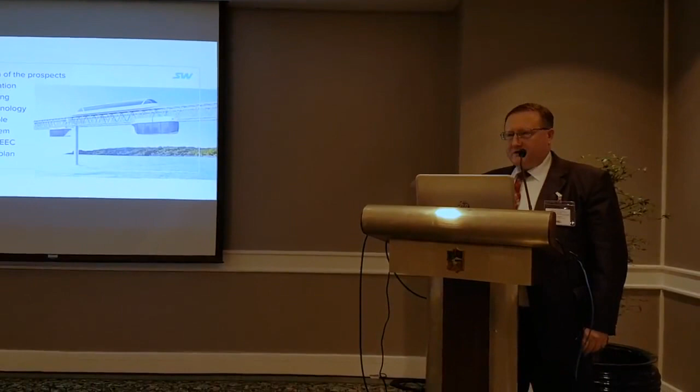Today I want to speak about the possible implementation of SkyWay technology for the Thailand Eastern Economic Corridor. First, I want to speak about the technology itself, so that you would know how it works. Then I want to speak about three possible applications which can be used here in Thailand. And I want to finish with the conclusions and the effect it can bring to the economy of Thailand.

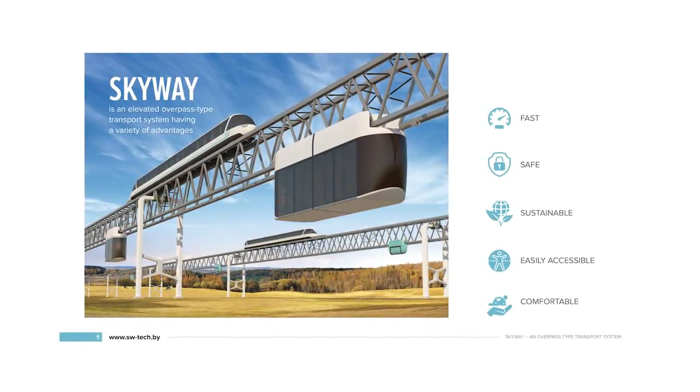First of all, what's SkyWay? It's a transport system situated at the second level, which has several advantages: it is fast, the speed is up to 500 kilometers per hour, it's safe, it's ecologically sustainable, it's easily accessible, and it's comfortable.

Now I want to show you a small video, so you will see everything with your own eyes. I want to attract your attention to the fact that everything shown is not computer graphics, but a real video operated in our agricultural park in Belarus.

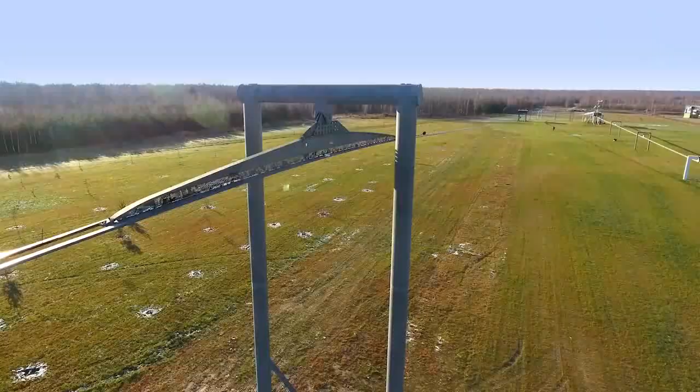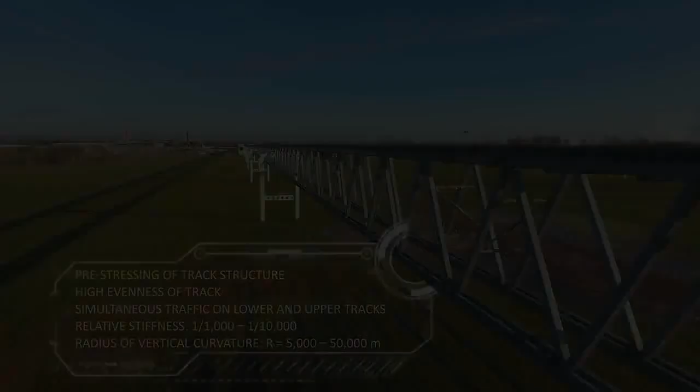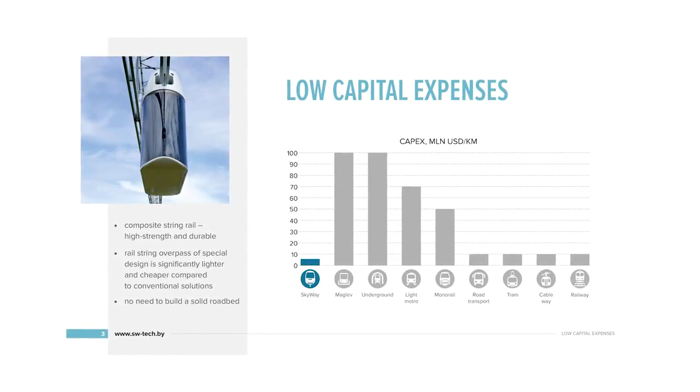The main idea is that we use a very light but very rigid string rail, which is based on pre-stressed strings put into concrete. That's why we get a light but very solid structure. That's why it consumes less material, and that's why it's cheaper.

Further on, we have minimal operating expenses. If we compare with conventional transport, we can see that the most part of the OPEX is labor expenses and cost of fuel. In our case, it's the least part.

Our transport is driverless, so we use an automatic control system — I will speak about that a bit later. And in general, our transport system is 2 to 5 times cheaper in terms of OpEx compared with conventional transport.

The next point is our transport system is ecologically sustainable. We use minimal land resources, and we use electricity, so it minimizes harmful emissions to the atmosphere, and lots of people like that.

And the last point is safety. The main issue here is that our transport system is situated at the second level, so it doesn't cross with existing transport at all, so traffic accidents are minimal.

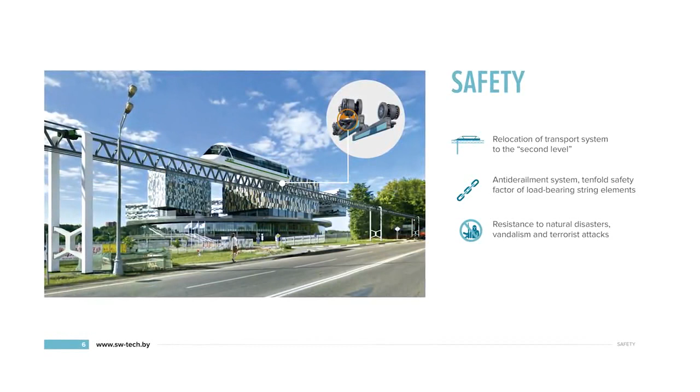The second point is the anti-derailment system, which you can see in the picture. It also increases the safety of our transport system, and it's resistant to natural disasters. The previous speaker was talking about floods here — it's also resistant to earthquakes, tsunamis, and other natural disasters, so this transport system won't be ruined if any natural disaster happens.

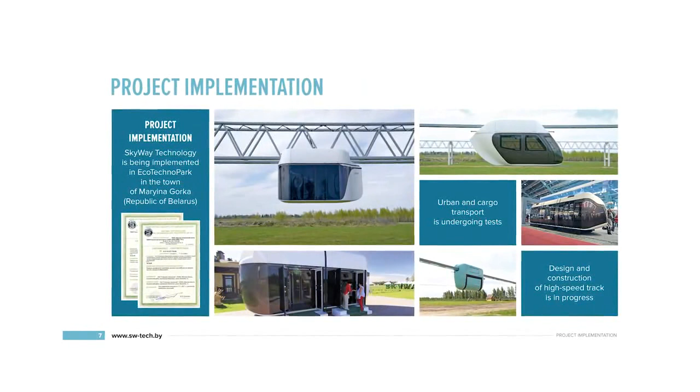I'll speak about them a bit later. Actually, at the end of 2017 we got certificates from the Russian Institute of Urban Transport. That's why these vehicles are not just operating, but they are certified.

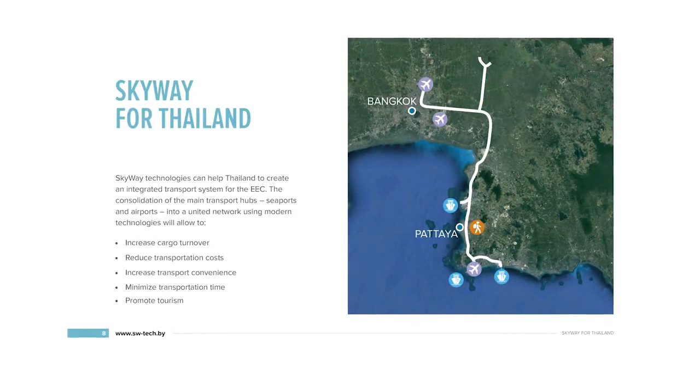Now let's think about how our technology can help the development of Thailand, in particular the Eastern Economic Corridor. You can see this map — the main point here is to connect the seaports and the airports into one integrated transport system. What can we do here?

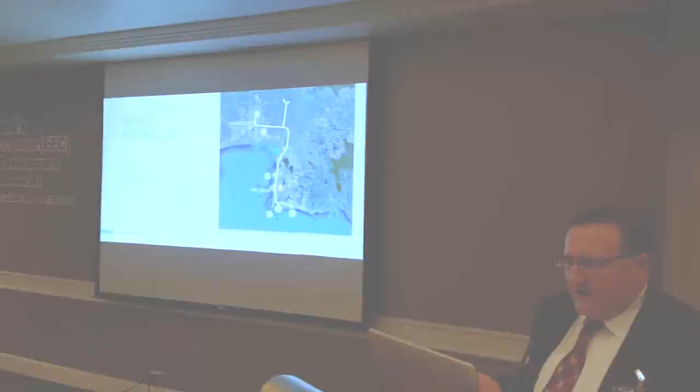First of all, we can increase cargo turnover, we can reduce transportation costs, we can increase the convenience of the transport, we can minimize transportation time because the speed of our transportation is up to 500 kilometers per hour, and we can promote tourism as well.

Now let's speak about our main solutions which could be applied here. First of all, it's cargo transportation. Speaking about the SkyWay transport system, it has several advantages: it's autonomous, it's point-to-point, it's high speed, it's ultra-safe, and energy efficient.

Here you can see how our container transportation could work. The speed is up to about 50 kilometers per hour, with automated loading and unloading. Its performance could be up to 30 million containers per year, and we can use the track, as I told already, for passenger transportation. We have different solutions not only for containers but also for bulk, break bulk, and liquid cargo.

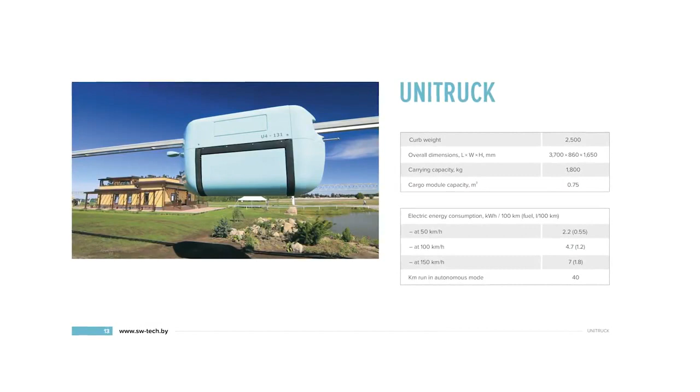This is our cargo module, called Unitruck. It's arranged for a small amount of cargo, for bulk cargo, actually 1.8 metric tons. But if we place them one by one, it can carry quite a great amount of cargo. We consider the performance of such a system about 100 million tons per year, even despite how small it looks. It's already operating at our EcoTechnoPark, so you may see it in the video.

We also have solutions for loading and unloading terminals, and I think all these cargo systems could be integrated, connecting airports and seaports into a unified transport system.

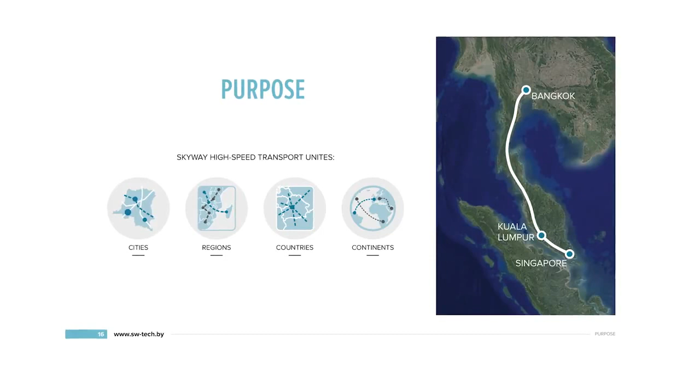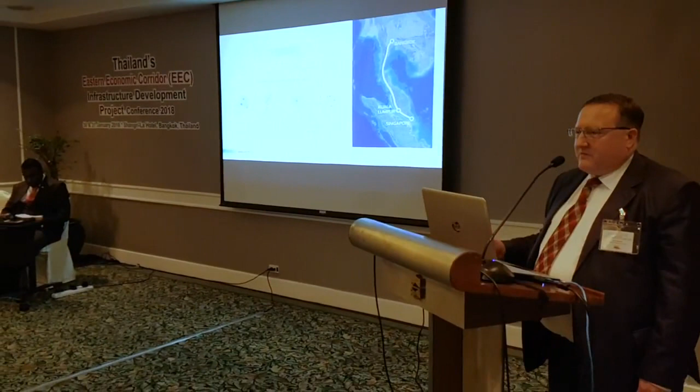The next solution I want to speak about is high-speed passenger transport. As I told already, its speed is up to 500 kilometers per hour. It's bigger compared with conventional high-speed trains, and it can be used to unite cities, regions, countries, and even continents. Here on the map I give a possible example of how it could be applied for Bangkok. We can connect Bangkok with Kuala Lumpur and Singapore, and yesterday we were discussing the Kuala Lumpur-Singapore project. I think this solution could also be applied to that project.

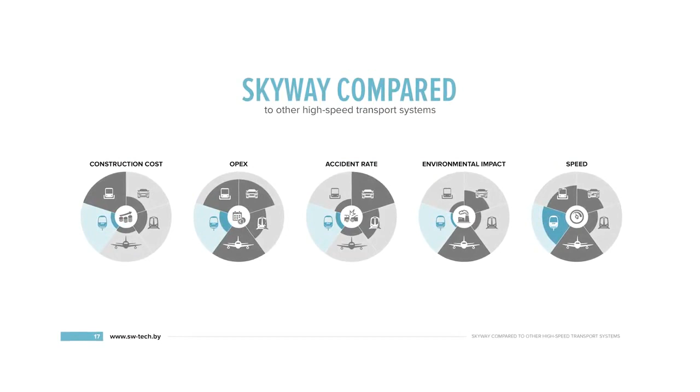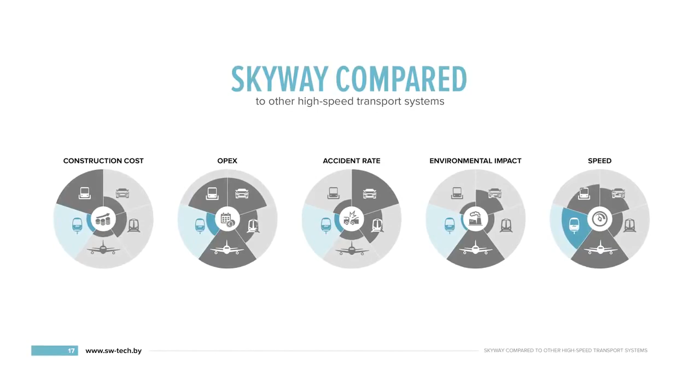If we compare SkyWay with other types of high-speed transport systems, you can see that in almost all parameters - construction cost, OPEX, accident rate, and environmental impact - we are better. Maybe the only point where we look a bit worse compared with aviation is speed, but we should take into account that if you go to the airport you anyway need to wait for boarding, stand in queues, and pass control.

In our case, you get from the city center or city suburb exactly to the city center or city suburb, and actually, whether you go 500 kilometers or 1,000 kilometers, you will get to your destination faster.

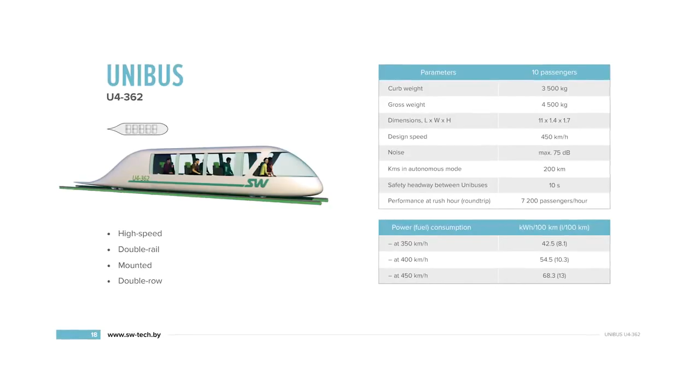These are the technical parameters for our high-speed Unibus. It's designed for 10 people, with a design speed of 450 kilometers per hour, and its performance is about 7,200 passengers per hour.

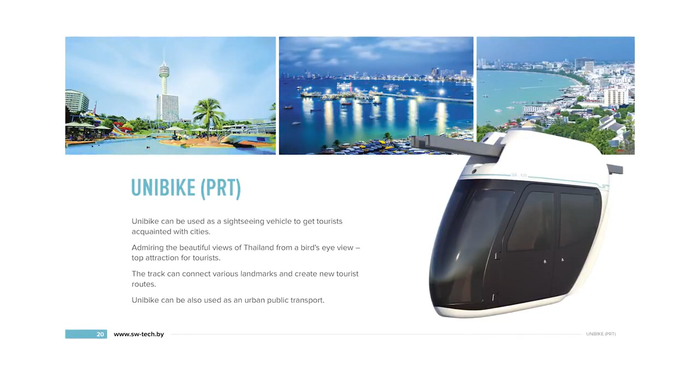The last solution I want to speak about is urban passenger transport. First, I want to speak about Unibike, which is some kind of PRT designed by our company. It's designed for 2 persons, but there could be solutions from 1 to 5 persons. It can be used as a sightseeing vehicle - for example, it would be really great to go by Unibike on safari, or to see natural places from a bird's eye view.

It can also be used as standard urban public transport. The idea is that we just put them one by one, so they can carry quite a lot of passengers. I'll show it later.

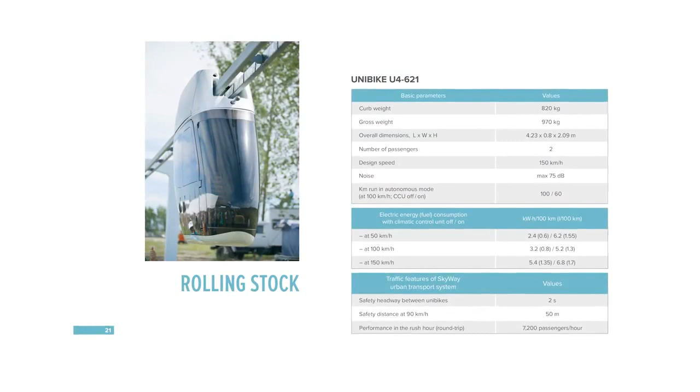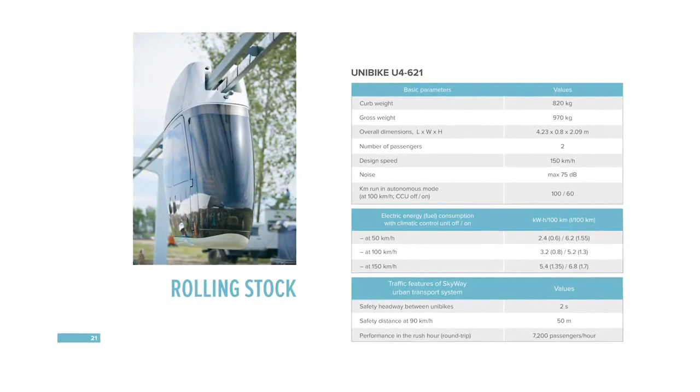These are the main technical parameters of Unibike. Its weight is just about 800 kilograms, and it can carry 2 persons. Please pay attention to the energy consumption - even at a speed of 150 kilometers per hour, it consumes just 1.7 liters of fuel equivalent. It's electricity, but the fuel equivalent is just 1.7 liters, much less compared to a standard automobile.

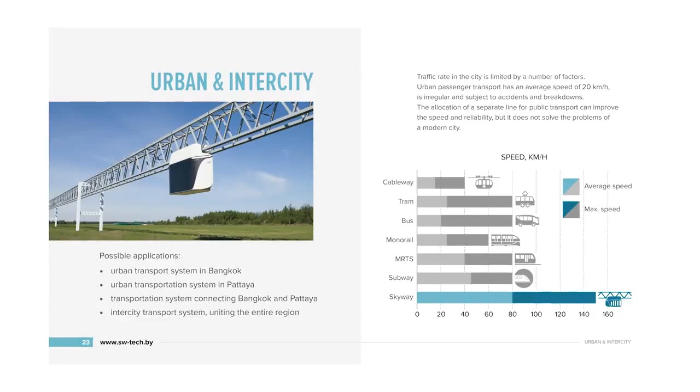I also want to speak about the other solution, which is Unibus, a full-fledged solution for urban and intercity transportation. This is an actual possible replacement of metro, buses, and any other types of transport. If you look at the graph, you can see that the speed of our transport is much higher.

Maybe you've already tried how it is in Bangkok. There are lots of congestions all over the roads, and it's quite difficult to get where you want in time. By using Unibus, it won't be a problem.

You will get wherever you need quite quickly. As we see, it could be used for the urban transport system in Bangkok and in the city of Pattaya, connecting Bangkok and Pattaya, because now it takes from 2 to 3 hours to get there. By using this transport, you can get there in 1 hour. It would be much more convenient and could boost tourism here. We can use it not only for these routes, but also for general intercity transport connecting the entire region, operating as a general system which unites all the points.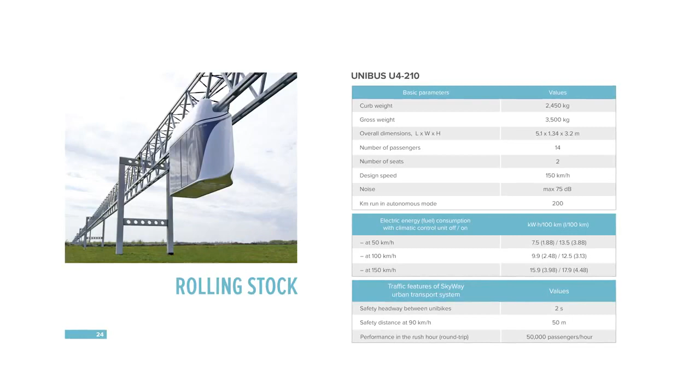These are the main technical characteristics of Unibus. As I told already, it's designed for 14 persons. One more interesting fact is energy consumption. If it moves at a speed of 100 kilometers per hour, and uses air conditioner, the energy consumption for 14 persons will be just equivalent of 3 liters of fuel. So even for 14 persons, it's much less compared with a traditional car.

And I forgot to say that its performance could be up to about 50,000 passengers per hour, comparable to the metro.

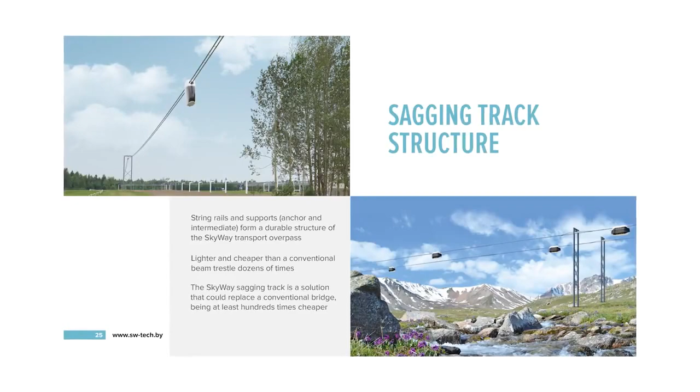One more solution, which could be interesting both inside and outside the cities, is a sagging track structure. It's a solution which replaces conventional bridges, but it's much lighter and much cheaper. You need not spend billions of dollars to build bridges, but this solution could be used instead. It's already realized in our Ecotechno Park in Belarus, and anybody can see how it works.

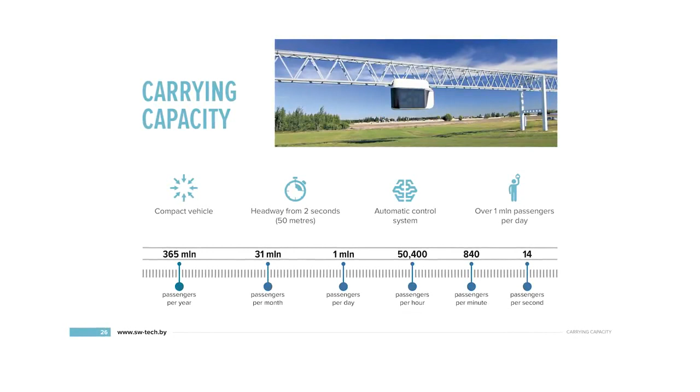This slide is devoted to carrying capacity. As I told already, it could carry about 50,000 passengers per hour and up to 1 million passengers per day.

Speaking about the benefits for urban development, Unibuses can be integrated into any urban infrastructure. It can have the following effects: improved living standards, reduced harmful emissions to the atmosphere, practically no road accidents, increased tourist potential, job creation, and increased economic potential and investment attractiveness.

This slide is devoted to our approach towards infrastructure. Some trade and service centers could be placed inside the stations, and we can also use our track structure as a place to locate fiber optics and cable power lines. I'll show it in the next slide.

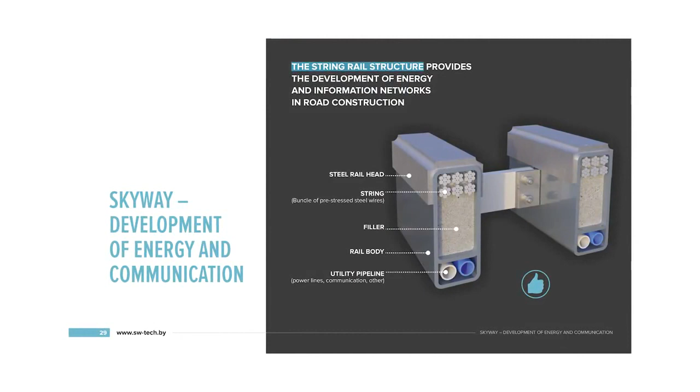If we are speaking about some hard-to-reach areas, which I think do exist here in Thailand, you can use this transportation system not just as transport, but also as a means to provide internet and electricity.

I already told that our transport system is driverless. It's operated by an automated control system, the main features of which you can see on this slide. It uses Wi-Fi and other points, and it involves both the vehicles and the stations.

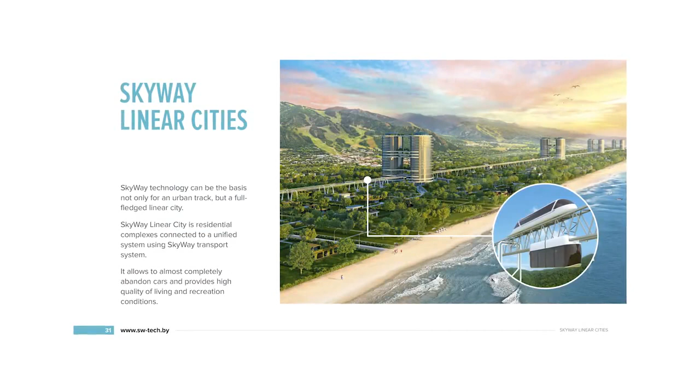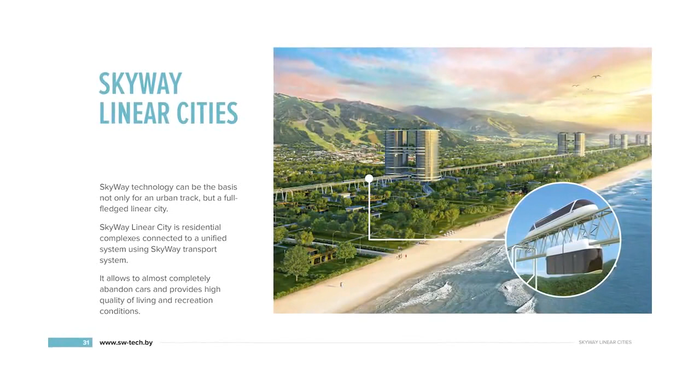One more solution which could be applicable here in Thailand is SkyWay linear cities. You can see in this picture that such cities could be created along the seashore, maybe in mountains, at any place convenient for life. You can live in a rural area, but you don't need any car to go to a place of work, study, or recreation, because it is connected by SkyWay transport.

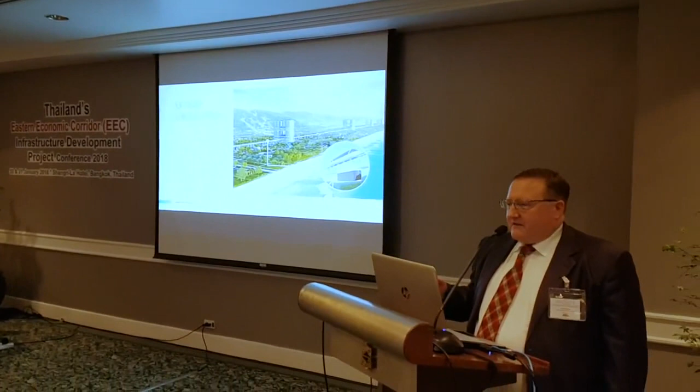You may use high-speed trains which can deliver you, for example, to Ho Chi Minh, to Hanoi, to Kuala Lumpur, to Singapore, and for short distances you can use urban transport. Everything is situated within walking distance, so you don't need to use a car at all. I can surely say this would allow people to live in a healthy area and enjoy life much more.

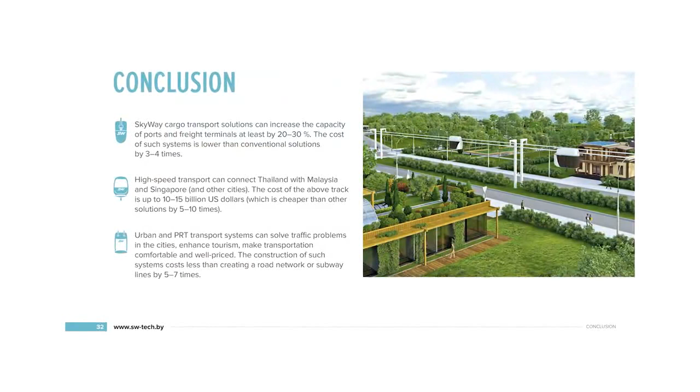Now I want to make a conclusion. First of all, our cargo solutions can increase the capacity of ports and freight terminals by at least 20 to 30%, and the cost of such systems is 3 to 4 times less compared to conventional ones.

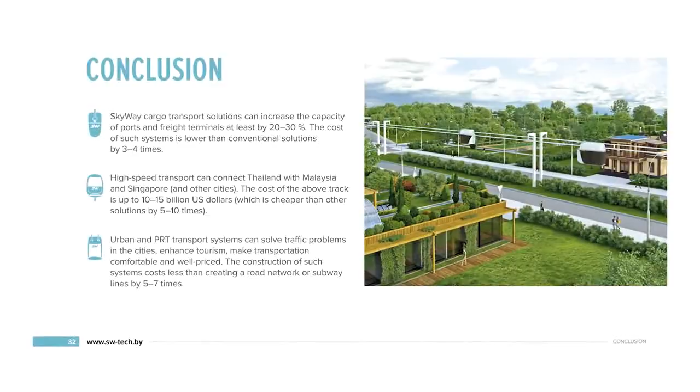Speaking about high-speed transport, we can connect Thailand with Malaysia and Singapore and other cities as well, and the cost of such a track, in my opinion, could be up to 10 to 15 billion US dollars, which is cheaper than other traditional solutions, especially the Japanese one, by 5 to 10 times.

The last point: urban PRT transport can solve traffic problems in the cities, enhance tourism, and make transportation comfortable and well priced. The construction of such systems costs 5 to 7 times less than traditional ones. Well, that's all. Thank you very much.